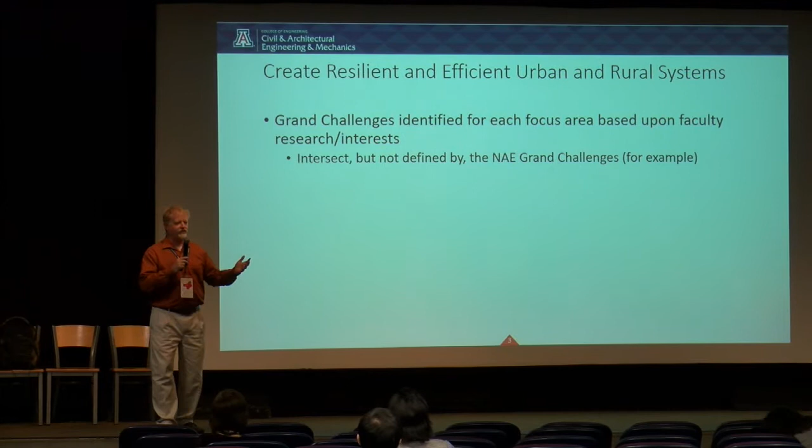As far as creating resilient and efficient urban and rural infrastructure, we've identified grand challenges for each of these focus areas from those workshops, again based on faculty interests. I want to say clearly, because at least in engineering people tend to go towards the NAE grand challenge when you say grand challenges, these things intersect with grand challenges from NAE and other organizations as well. But they're really focused on where our faculty interests lie and what are the big problems they're bringing to bear here at the U of A.

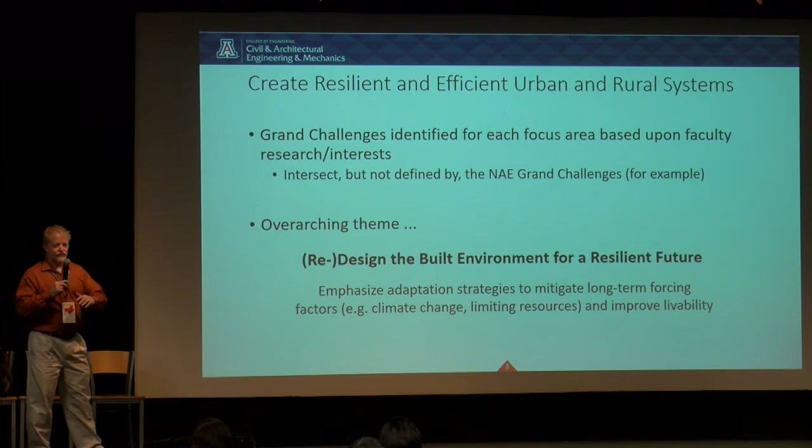So, building on strength: the overarching theme of this particular focus area is the redesign of the built environment for a resilient future. Broadly speaking, this emphasizes adaptation strategies to mitigate long-term forcing factors like climate change or limited resources, and to improve livability. That's a broad description, and it should be considered broad.

More specifically, there are 3 different areas: decarbonization, dematerialization, and circular metabolisms—basically ways of reducing or reusing what would traditionally be a waste stream; creating efficient urban food systems, bringing food to the population in an efficient manner with respect to resources; and integrated water resources management over multiple scales, thinking about how we do water resources management from the source to the tap, and reclaiming that water.

These can all tie into the idea of achieving net zero resource consumption in the built environment. Net zero may not always be feasible, but it's a goal we can strive toward, and if nothing else, we're improving our efficiency. These all fit into that idea of a net zero resource consumption model.

Today we're going to be talking about efficient urban food systems and integrated water resources management, and how they tie into net zero resource consumption. One of the seed grant fundings we got was on net zero urban water, and Courtney is going to talk a little bit about that to give you a brief idea.

We used water today as the theme, but when we talk about net zero resources, it can be much more—it doesn't have to be water, it can be any kind of resource. The other thing we tried to do is bring together talks that span from the technical side all the way to the policy side, because we're never going to achieve all of this unless we start to incorporate all of those different aspects together in a solution.

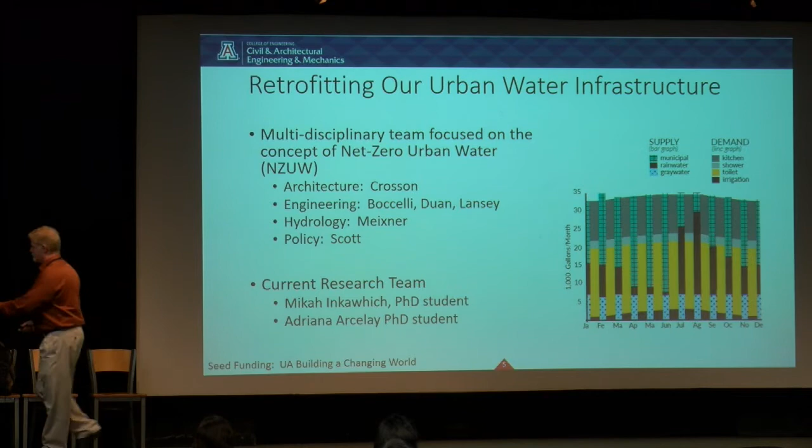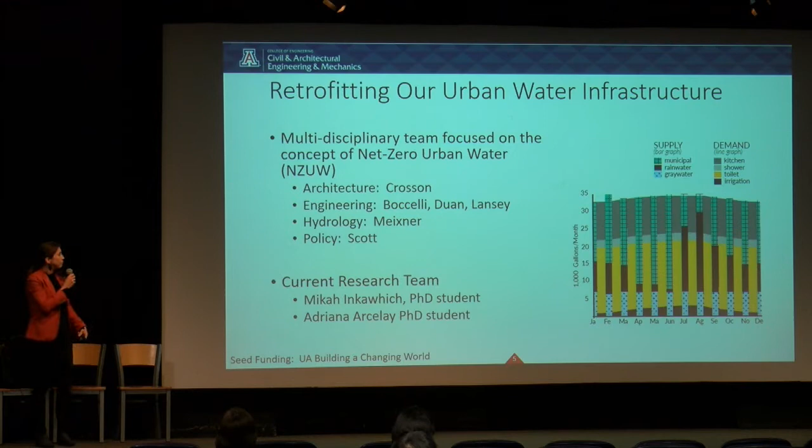Thanks, Dominic. So like Dominic said, he and I are part of a group that received some seed funding from the Building a Changing World initiative. We've been working with colleagues also in hydrology, policy, geography, as well as architecture and engineering, and our focus has been on this question of achieving net zero urban water.

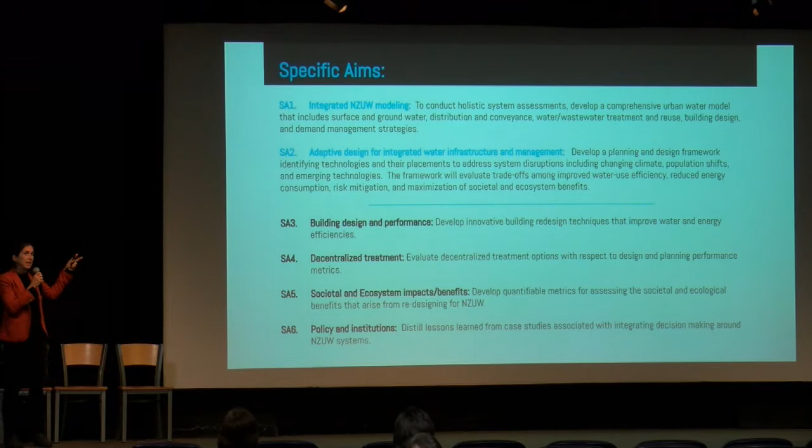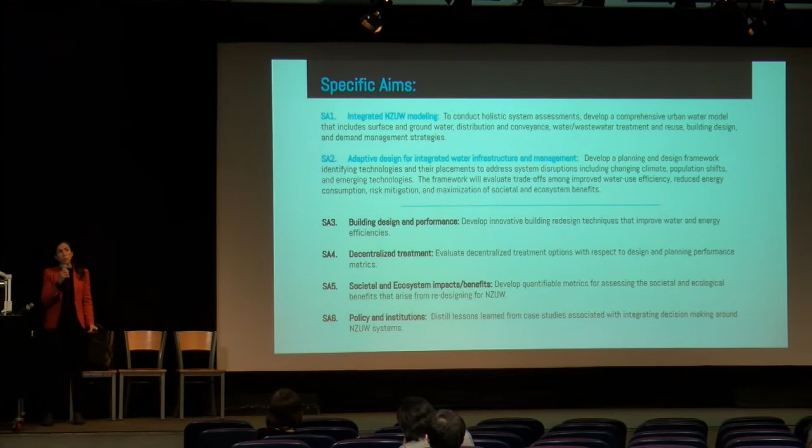You can see our 2 main specific aims up here, and then a few other specific aims below those. Basically the aim is to come up with, both as a tool and an outcome, an integrated net zero urban water model, and then from that, adaptive designs for integrated water infrastructure and management. We've been meeting this semester every other week, and have held 2 workshops to date.

What we've done this semester is come up with 5 specific research areas within this larger net zero urban water framework initiative. Today our 4 talks will not map directly into these 5 research areas, but follow them fairly closely.

The first one looking at urban agriculture, and then the second one really Dominic's, looking at this second research area about retrofitting the urban water system for decentralized and alternative water sources. My talk is third, and I'll be looking at both green infrastructure in research area 3 and then also area 2. Adriana will finish us off looking at public preference and community engagement, and also looking at green infrastructure within that too. So without further ado, we'll turn it over to our first presenter.

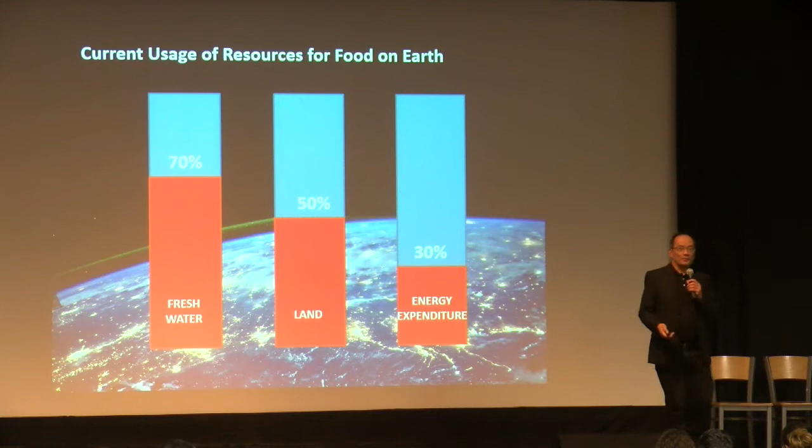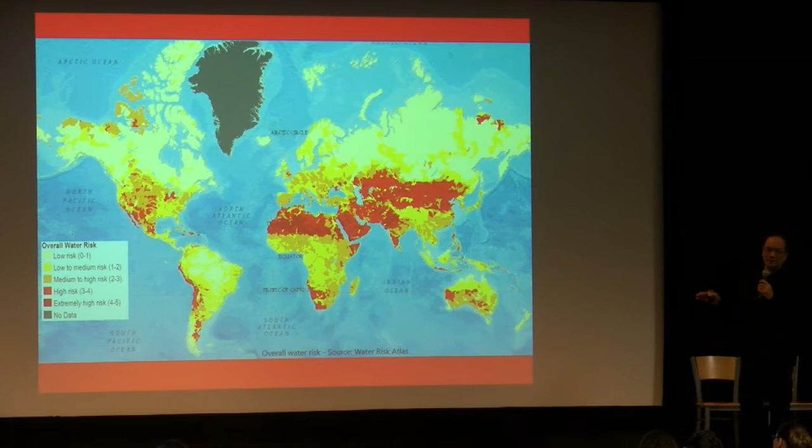So the crucial question now is, do we have all of these critical input resources to be able to meet the demand of our planet for food? And as if that's not enough, our increasingly erratic and changing climate is also introducing a lot of uncertainties and disruption in our global food production and supply. So all these lead to this inescapable thought that, at least in terms of food and the input resources needed to produce the food, such as water, we all are living in a world of scarcity.

But then again, I'm in the habit of reminding my students that we are occupying that commanding height of creating innovative solutions to address the grand challenges of the planet. So we only treat this world of scarcity as a mirage, a beguilingly deceptive, but by no means permanent condition. To put this in context, we need to consider other worlds that are really worlds of scarcity, such as Mars.

On Mars, there's no arable land, no running water. It suffers from wild swings of extreme temperatures, and it's constantly bombarded by deadly ionizing radiation. Bottom line, there's nothing that grows on the surface of Mars, at least outside a built environment. But inside a built environment, you can grow pretty much anything on Mars. And this is no science fiction.

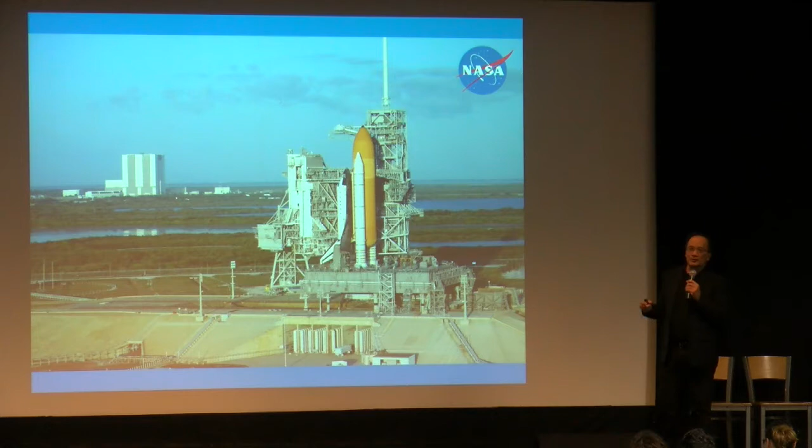It is sealed, and in there you control the important variables for growing crops: temperature, light intensity, light quality, light duration, relative humidity, air movement, and the nutrient composition in the hydroponic nutrient solution that's used. NASA has shown that it can grow pretty much all types of food in this sealed type of environment for long duration space missions.

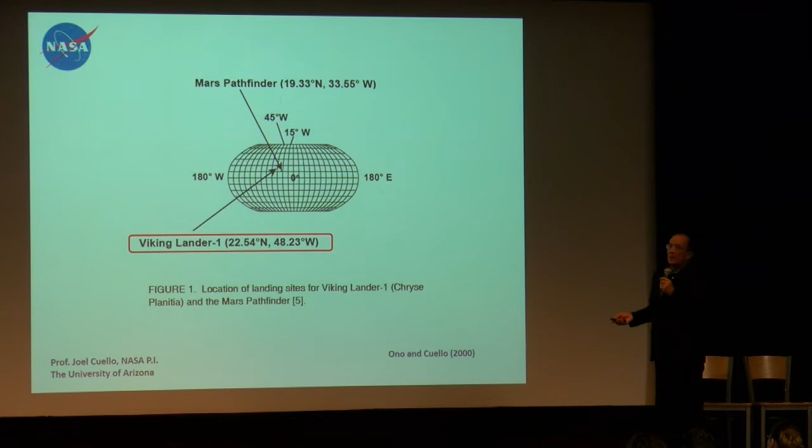When I moved here to the University of Arizona back in 1995, I continued my work on controlled ecological life support systems, including designing the very first hybrid solar and electric lighting systems applied to bioregenerative space life support systems. We did some simulations for landing sites on Mars, and we've shown that by the use of these controlled environment systems, we're able to reduce the energy demand for food production in space by about 40%.

Of course, decades have passed, and I'm sure the efficiencies of fiber optics are much better now, so you can arrive at much greater reduction in energy demand. So what NASA has shown is that when you have technology and innovation—a technosphere—appropriately applied to our resource sphere, our world of scarcity, it is well possible to transform that world of scarcity into a world of abundance.

So back on Earth, in Japan, in the 1980s, a number of entrepreneurs essentially applied the innovations that NASA had developed for extraterrestrial life support systems to develop closed, controlled environment plant factories, or vertical farms. That was the beginning of the vertical farming industry on Earth. It's particularly interesting for Japan because Japan doesn't have a lot of land resources to feed its large population, so it really made sense for them.

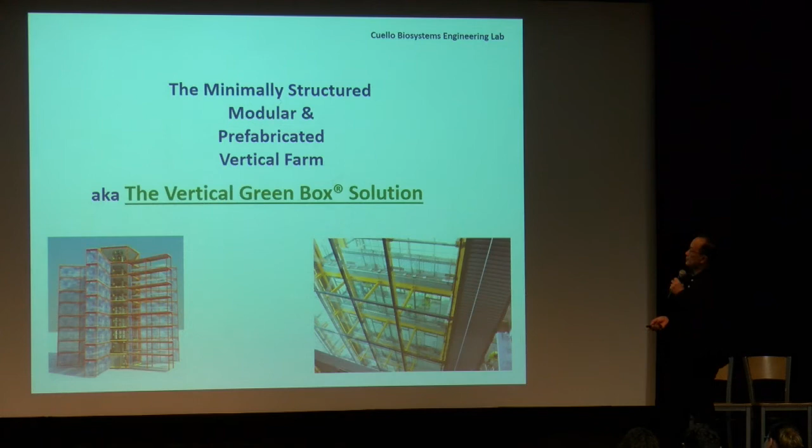Dickson Despommier is a retired professor at Columbia, and he wrote a book called Vertical Farming—he's the big exponent for the high-rise type or paradigm for vertical farming. What I've been championing is the modular structure for vertical farm, just because it's more accessible and more affordable to more people, allowing more people to gain entry into the vertical farming industry. Specifically, I'm championing the minimally structured, modular, and prefabricated vertical farm, which could have versatile configuration.

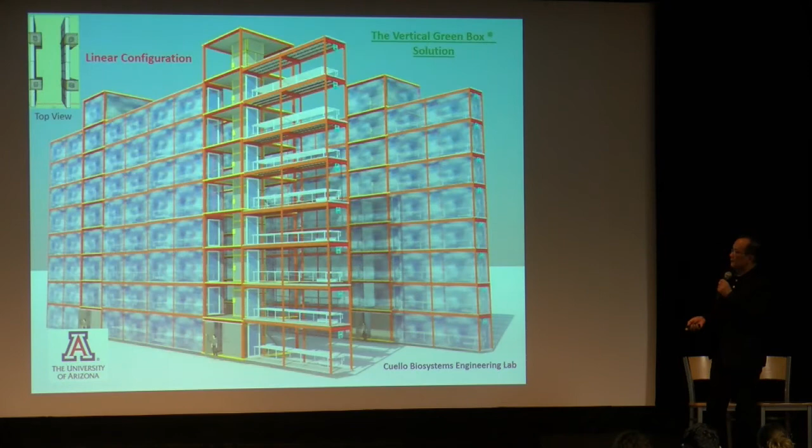You've got your modules that can be arranged in different geometric configurations, like a cylinder configuration, a linear configuration, and of course there are many other possibilities.

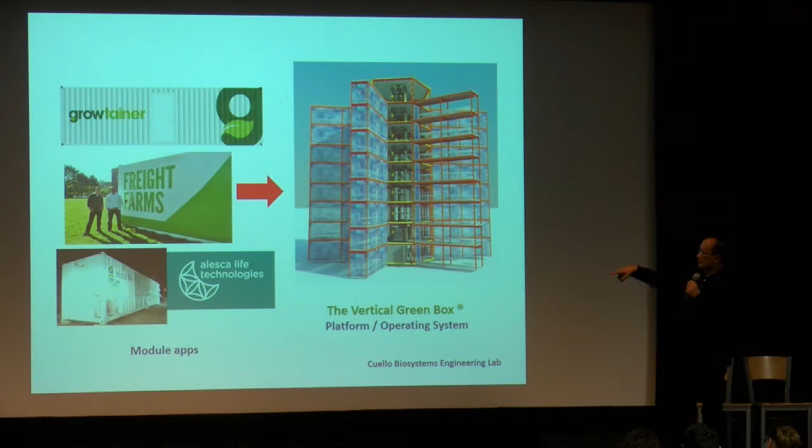A practical example of a vertical farming module would be your standard shipping container. In fact, a number of companies have been working on retrofitting shipping containers, turning them into modular vertical farming units. Here at the U of A, we have one we play with together with my grad students. We call it the Arizona Green Box, funded by the UA Green Fund. But we also design our own original growing systems inside the modular unit so that we could really maximize the amount of crops being produced.

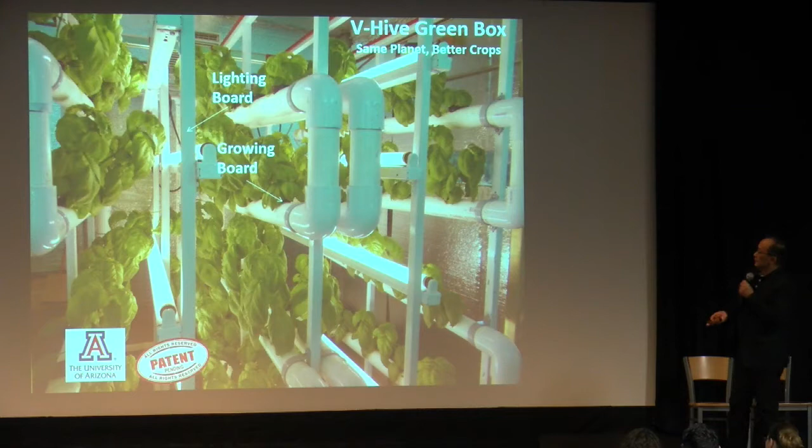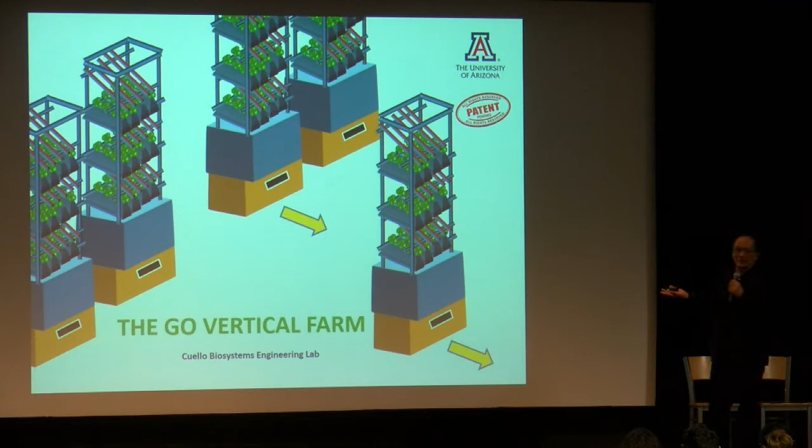This is called the V-Hive Green Box vertical farming unit, patent pending by the U of A. And this is another one - this is a mobile type of vertical farm. It constitutes really a whole new paradigm for vertical farming. As opposed to a fixed vertical farm, you now have a mobile vertical farm with those mover robots, kind of like the system Amazon has in its warehouses.

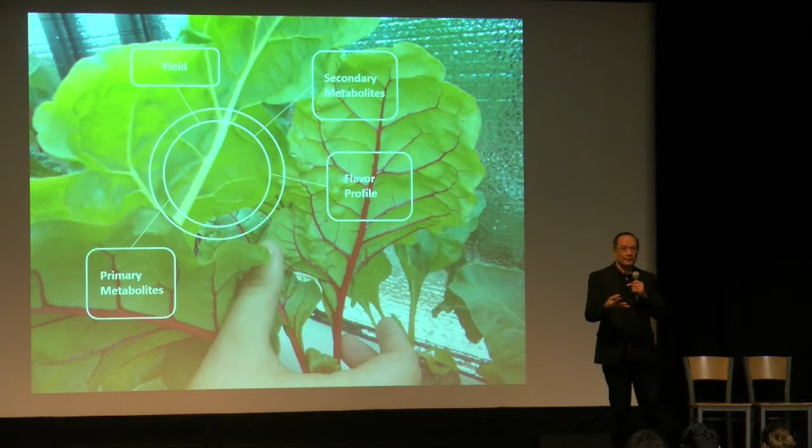So anyway, vertical farming is really emerging and spreading worldwide today. It's not only because it leads to maximum yield, maximum quality, maximum flavor profile, and optimized nutrient profile for the crops they produce, but also because they save on the input resources needed to produce crops. For instance, it saves about 80 to 95% of water compared with open field cultivation. And now with data analytics and artificial intelligence, there are ways to minimize input resources such as heat, nutrients, nitrogen, potassium, phosphorus, CO2, light, and so on, so that you can still produce the same amount of yield and the same quality for the crops.

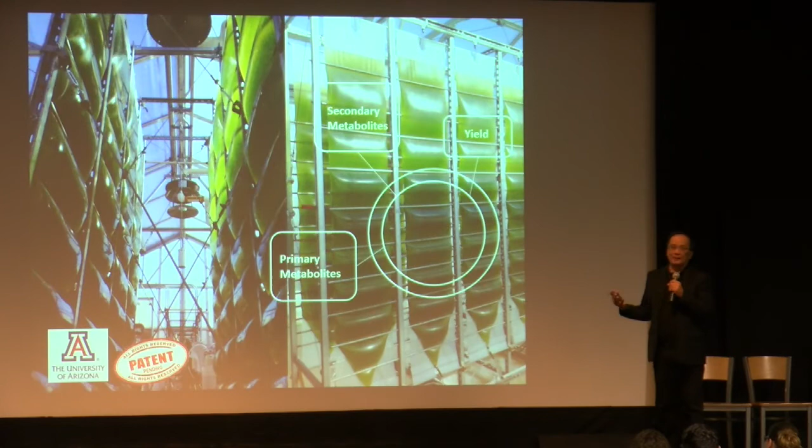And of course, it's not only conventional food crops that you can grow in vertical farms. You can grow algae, which produces a lot of valuable chemicals or products. You can produce fish, and you can produce mushrooms as well.

So then how do we make vertical farms integrated components or nodes in a circular economy in an urban area and ensure its sustainability and resilience? Of course, it's good if cities have access to renewable forms of energy such as solar and wind, but not all cities do. However, there's one thing you can rely on with cities, particularly big cities, and that is they produce tons of waste.

So let's consider New York City. I'm citing New York City because there's a number of vertical farms now there. New York City produces 1.3 billion gallons of wastewater per day and 38,000 tons of solid waste per day.

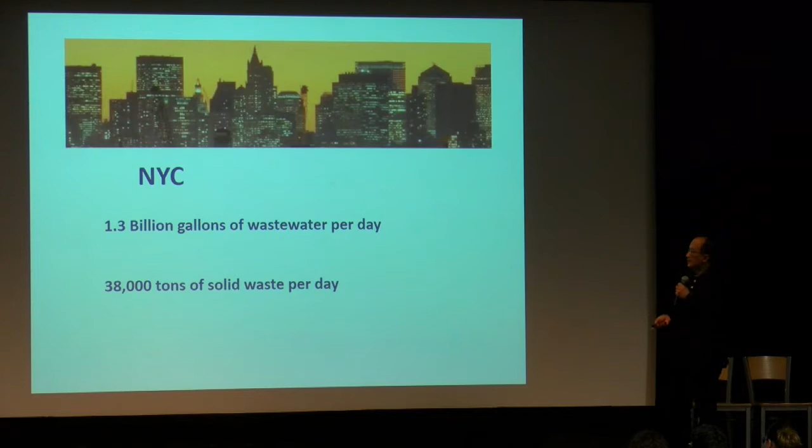It's been designed to accommodate 1.5 million gallons of sludge daily, even though they're not operating at full capacity yet, and up to 500 tons of organic food waste per day. What's remarkable about this Newtown Creek facility is that they're not only using wastewater - they're collecting organic waste, such as food scraps from hospitals, schools, homes, offices, and adding them into the sludge.

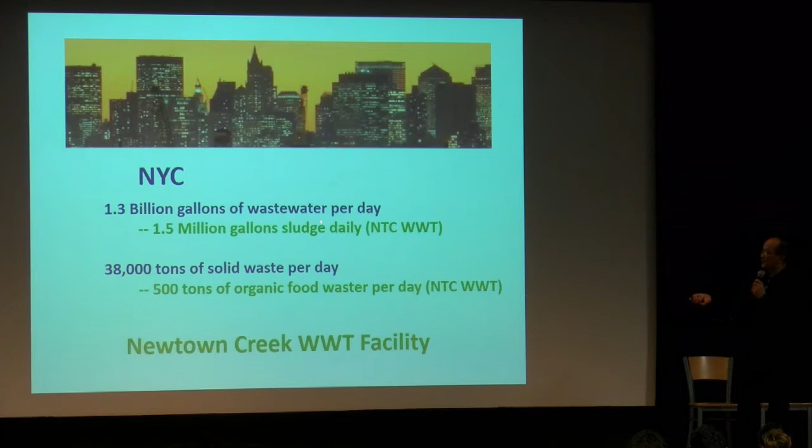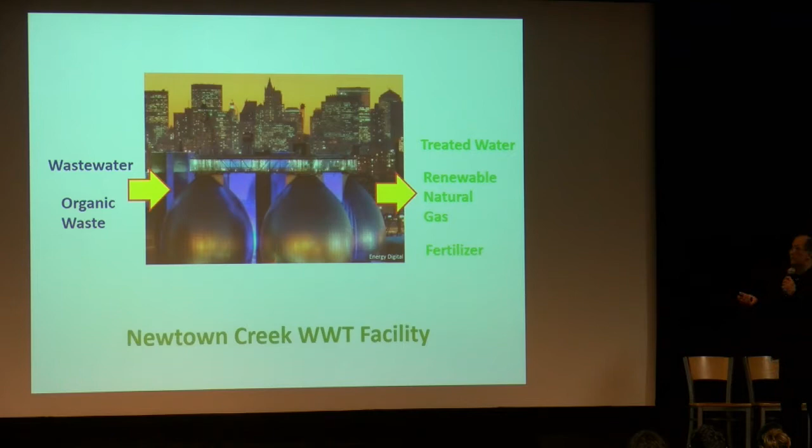And the great thing about that is with wastewater and organic waste as input, you produce not only treated water, but renewable natural gas. Of course it's biogas with methane, but with further processing you generate pipe-ready renewable natural gas, as well as concentrated fertilizers.

So based on this, it's possible to construct this circular economy scheme where you have these nodes of production and consumption interlinked by the influent and effluent streams they produce, so that overall you minimize and hope to reduce to zero the waste produced by any one of these nodes. This is very much consistent with the aspiration to come up with a net zero resource plan.

For instance, the homes produce wastewater and food waste. They go into the treatment facility, and there's treated water and renewable natural gas that can be channeled back into the homes. The vertical farms produce a lot of inedible waste biomass - they could be brought into the treatment plant, and in return you get water, fertilizer, or renewable natural gas.

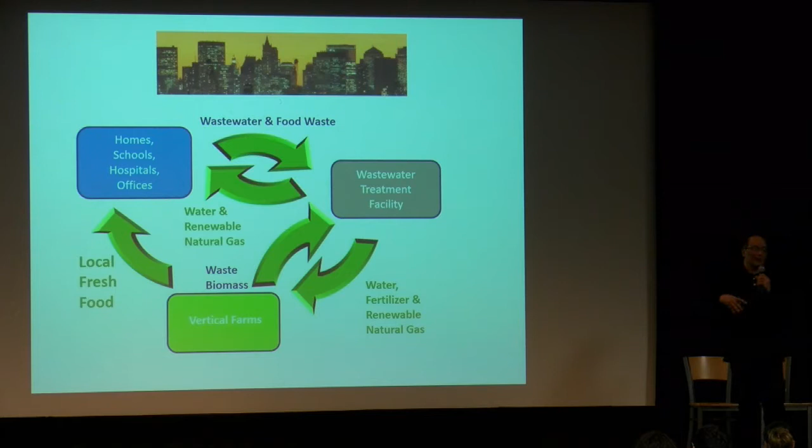And of course, with vertical farms, you produce local, fresh food. You cut down on carbon emissions because your food doesn't have to be transported thousands of miles from the West Coast to the East Coast, in this case, for instance.

So this is the grand plan that Dominic shared earlier, and I want to emphasize the urban food production here. One way of looking at this going forward is that you can consider this entire thing as one plane. I could refer to that as the water plane, and then you've got the food plane and the energy plane, and each one of these planes are interacting with one another.

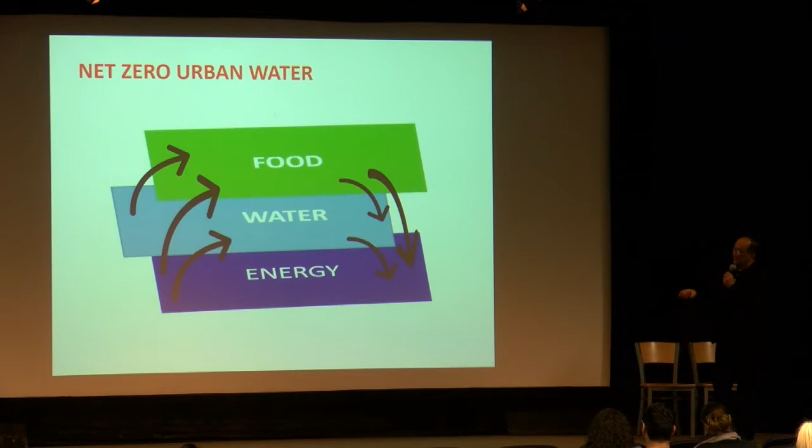So you have your net zero urban water within the context of the water, food, and energy nexus. I'm proposing that net zero urban water is most effectively designed within this context. So that's the food for thought I'm sharing with you today. Thank you.

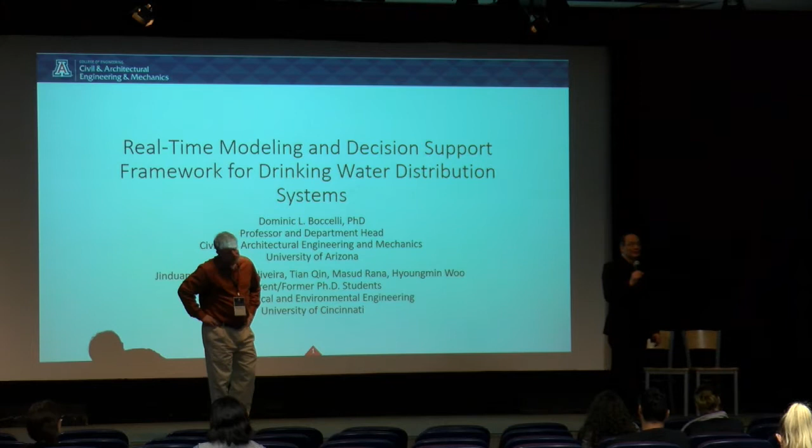Yes. Correct, yes, that's an excellent question. As I mentioned, the vertical farming industry began in Japan.

In Japan, it's very much readily accepted by the citizenry because Japanese consumers are willing to pay for something that's really of high quality. I've been to, I think it's called Shinjuku, one area in Japan, where they're selling apples for $100 each because it appears perfect in their eyes. So in Japan, this is true, they have no problem.

In China, I was surprised because vertical farming is really taking root there, and that's because the population has been rocked by a lot of food scandals and food contamination issues. So families are now really concerned about the safety and quality of their produce, and they're willing to pay a higher premium for produce coming from vertical farms as opposed to open farms. The same is true here in the United States, at least that's the public perception, as well as in Western Europe.

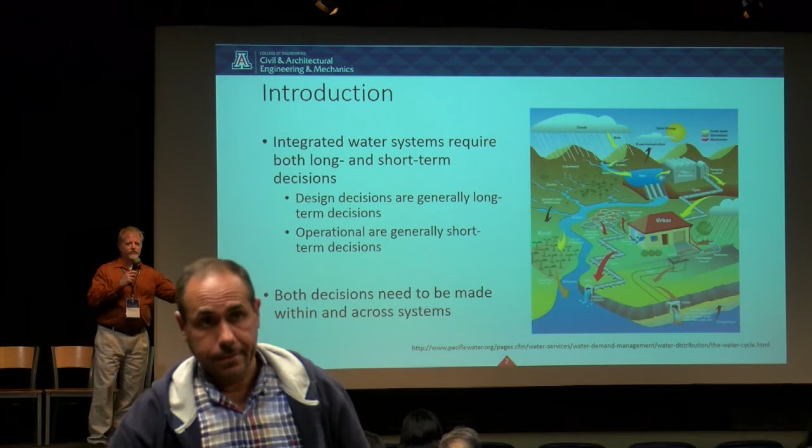So we started off, Courtney started off the talk by bringing up this notion of net zero urban water—this idea of going from supplies to the consumer and basically reclaiming and reusing that water to try to minimize our need for new sources.

These integrated water systems really require us to have both long and short-term decisions. Design decisions are generally long time-duration decisions—when you build infrastructure, you're thinking 40, 50 years down the road. Operational issues are the short-term decisions needed to make sure these systems all work efficiently together. Both of these decisions have to be made within their specific systems and across the systems.

We need to be able to estimate unobserved system states—for example, where the flows are everywhere in a system, like river flows. We can't measure everything, so we have to estimate these states, and we need to be able to forecast performance, particularly as we're making decisions.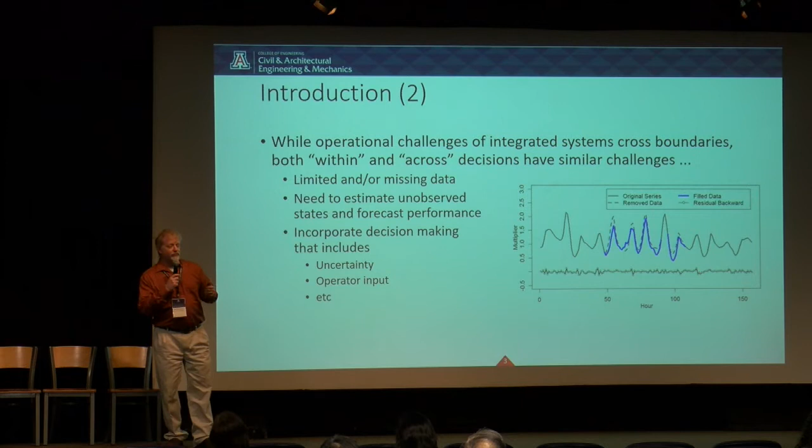Incorporating that decision making, in my opinion, we need to incorporate the uncertainties. There's all sorts of uncertainties that need to be incorporated to make sure we have robust decision making. A lot of this requires operator input—operators aren't going to just buy into what a computer model tells them to do. So this kind of decision framework needs to be usable, while also giving operators information so they can incorporate unmodeled aspects if necessary.

These models are not generally tightly connected to the data that utilities collect, meaning utilities collect data and see it, but their model is on another side—in general, the model and the data streams aren't integrated. These models also may not be adequately calibrated; they're tuned for certain times of day or a season.

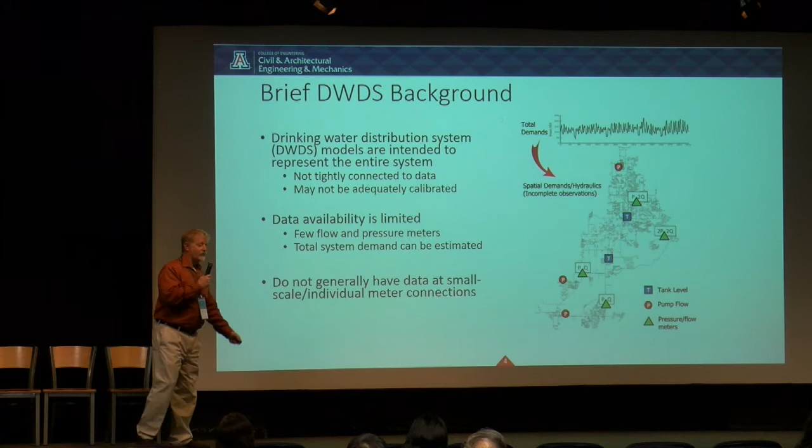Data availability is generally limited. You can see this system here, a medium-sized city, only has about 15 measurements in the system between flows and pressure. So there's limited data, and demand—how we use water—is really what drives how water moves through the system. While we have an idea of total demands, we don't necessarily know the spatial distribution; we generally don't have data at really small scale or individual meter connections.

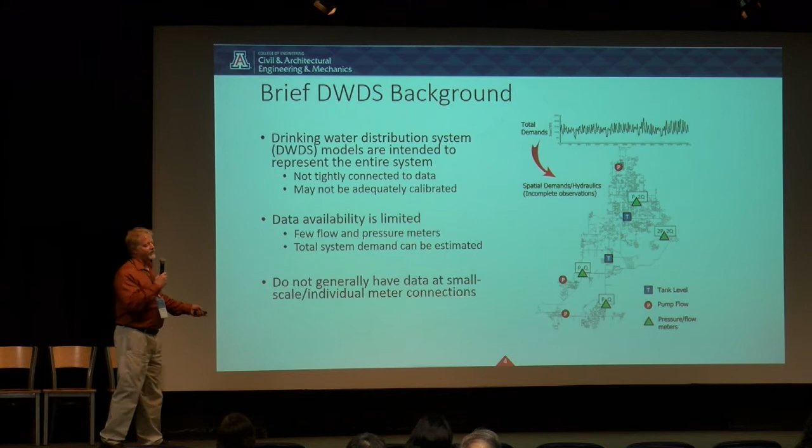Now that is changing with smart meters—more utilities are collecting that data. A lot of the ones that collect it actually have no idea what to do with it once they have it, and that's what we're hoping to take advantage of. But in the meantime, a lot of utilities haven't gotten to that point yet. So we generally need to be able to estimate these demands throughout an urban environment, and then forecast it, which will allow us to make our decisions.

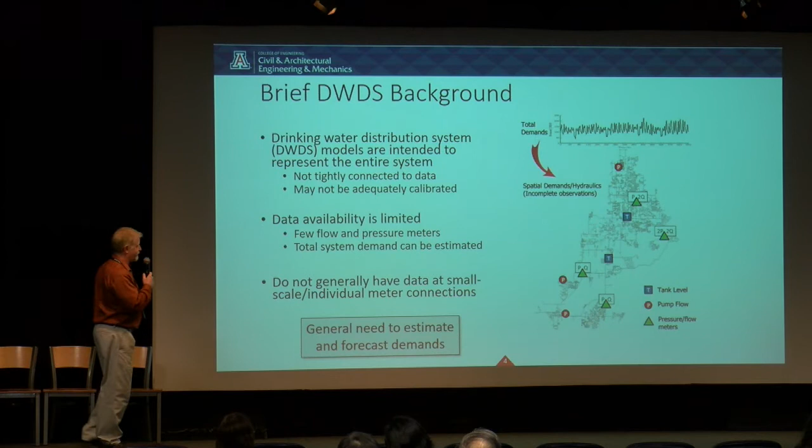So very broadly, we've developed an algorithm. My student Jin-Duan Chen is fantastic, he developed this composite demand hydraulic model. What he did is basically take time series modeling techniques to represent demands, because if you look at how water is used in an urban environment, it's very diurnal. It goes up in the morning, down towards lunch, back up in the evening, then drops overnight. So it's very conducive for using time series modeling. And we've linked that with a hydraulic solver called EPANET, so basically if we know the demands, we can know the flows and pressures throughout the entire system.

So the algorithm we developed is able to estimate consumer demands at an hourly time step, or sub-hourly if we wanted to. Using that data, we can estimate parameters of our time series model, and that becomes important because it really allows us to forecast. So we're the first group to really start thinking about how do you take this data and estimate the demands, which a lot of people did, but how do we use that information to do forecasting, which allows us to do decision making.

So we've done this assessment with a real world system, this one from Florida. It has 6 flow measurements, 9 pressure measurements, and 60,000 service connections. The model has 12,000 nodes. A service connection is basically any meter. As far as these kinds of models go, this is pretty detailed, a lot of models don't get down to this level. Most of this area is residential, with a couple small commercial zones. We're using this as our test case.

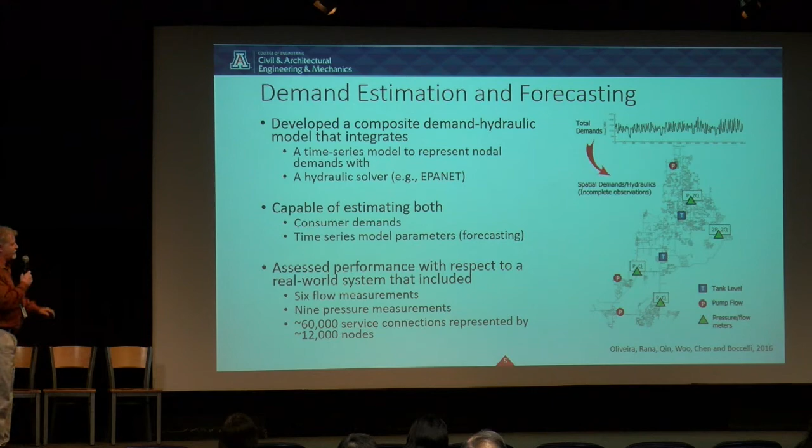We did a lot of field work down in this particular area of Florida. The biggest challenge we have is we've got to reduce the number of unknowns. The pressure data doesn't really help much with estimating demands, so we basically have 6 flow measurements and 12,000 unknowns. That's not a feasible problem.

So to reduce the parameterization, we've been doing work on different clustering techniques. This one was done using sensitivity information, looking at how the demands affect the flow values we have measurements for, using a singular value decomposition approach. That gave us these 4 clusters here. The northern region gets split up into 3 zones, the south region just 1 zone. The northern region is more densely populated.

What we've done is estimate the demands in each of these clusters, and then we have a time series model that we can use to forecast the aggregate demands in those clusters. So we've got 4 clusters, and this work is showing 4 clusters and 6 different results for the 6 flow meters. The flow meters here are given by the arrows. I'll start here - this is the treatment plant. There were 2 flow meters out of the treatment plant, 2 in this northern region where the flow branched off, and 2 in the southern region along 2 parallel paths.

There's lots of results I could show you, but I'm going to focus on just the flow measurements. This top row are the 2 flow meters leaving the treatment plant - the black lines represent the estimated values and the blue are observed. We get pretty good representation of these values, which is nice because we're not saying what the total demand is, but we're coming back and saying, okay, we're getting basically the total demand, so we know the demands are giving us the total overall system demands.

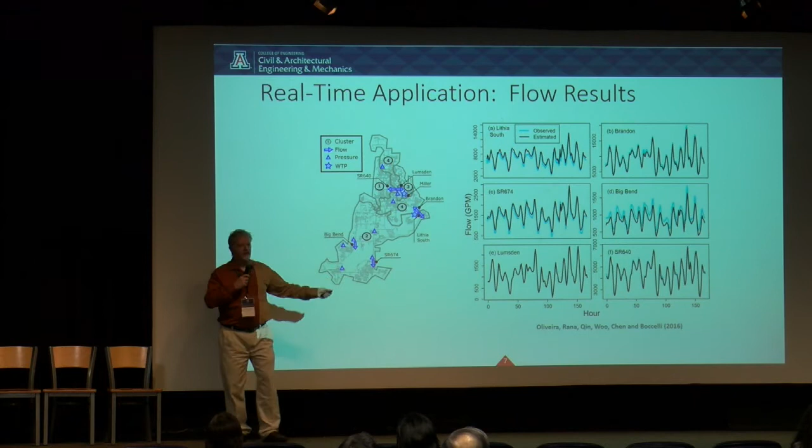This middle row are the 2 flow meters in the south region. The one in the east we tend to overestimate, and in the west we underestimate, but mostly because this is in one big cluster. If we had a little bit more data, we could maybe split this and get better spatial distribution of our demands and do better there. But all in all, that's still not bad. And then these 2 flow meters, we get almost perfect results because each flow meter basically ends up being associated with a cluster.

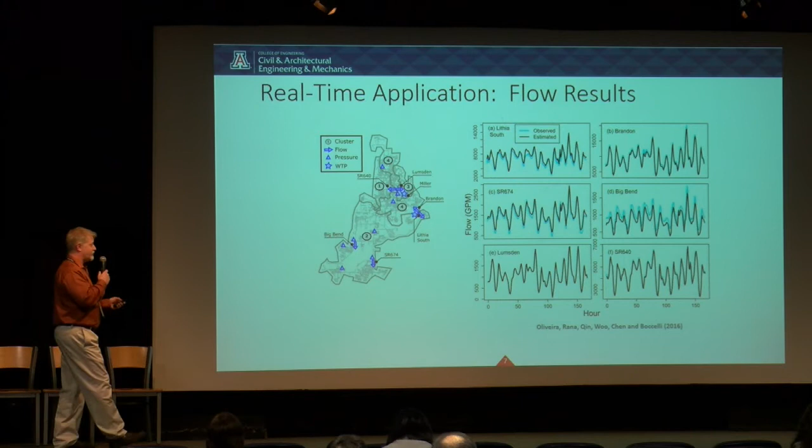So these are all improvements to what the utility had originally with their network model when we just ran it. I try to tell my students, that's great, we can match those 6 data points, but what does that really mean for the overall network? So we also did some tracer tests, which I can't go into here - 40 different monitoring locations, and we compared the tracer signals before and after we did this work. We see an improvement overall in the system in the transport, so we know we're doing a better job representing the overall dynamics within that system. And what that allows us to do, if we feel like we have a better handle on what's going on in the system, we can start to do this in real time.

We can do real-time demand estimation and forecasting, and that allows us to do some operational decision making. So where we're at right now, I'm going to go into that decision making part, we're talking about energy. Drinking water distribution systems generally use about 3% of the US electricity.

Pump scheduling is normally done modus operandi. You've got your utility operators there in a command center. They utilize knowledge about future demands. This represents a diurnal pattern, a discretized diurnal pattern that generally happens every day, different magnitudes, but that's pretty much the shape. They know the system, and they usually know it really well. They know at least where the water is going, roughly.

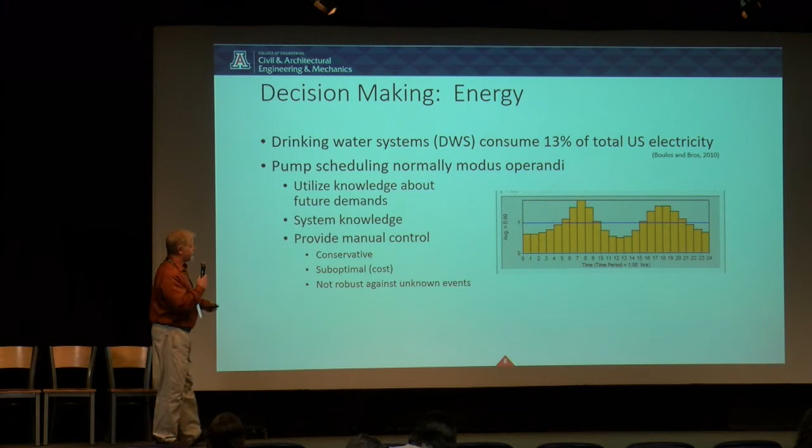And they provide manual control, which tends to be conservative, which is okay because utility operators want to make sure we have water. It can be suboptimal. They're not trying to always say, okay, we've got this quick cost break here, let's go and pump more right now. They may not get that information in enough time. And the decisions may not be robust against unknown events.

So we've taken this demand estimation and forecasting algorithm we've developed and applied it to the real world. What I'm showing you here, these are 2 different clusters. The black lines represent estimated values. These blue bars are actually a 1-hour ahead forecast. I'm not going to get into details on that.

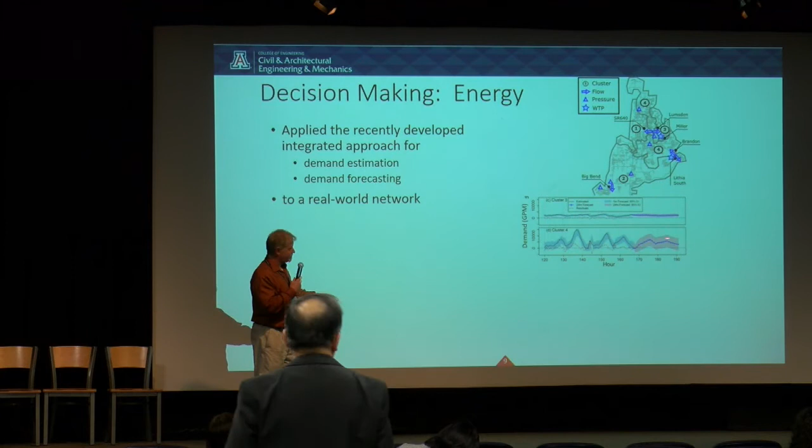What's important is we can stop at this time and say, okay, this is our real time where we're at now. We can forecast demands ahead in time, as well as the uncertainty, and that provides the basis for our decision support. Because if we can say these are our forecasted demands, we can simulate that in our whole network model. We can look at, for example, this tank level. This red line represents an expected value, and all these little blue wispy lines represent the uncertainty or the response to uncertainty in those demand forecasts.

So when we try and make pump decisions, we want to make sure that we're accounting for all that uncertainty in the system. And so we're using this information now to try and improve pump operations while accounting for that uncertainty. And how do we do that?

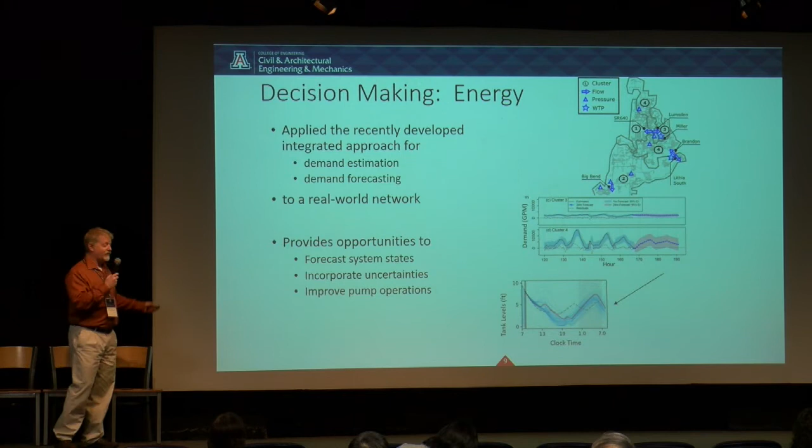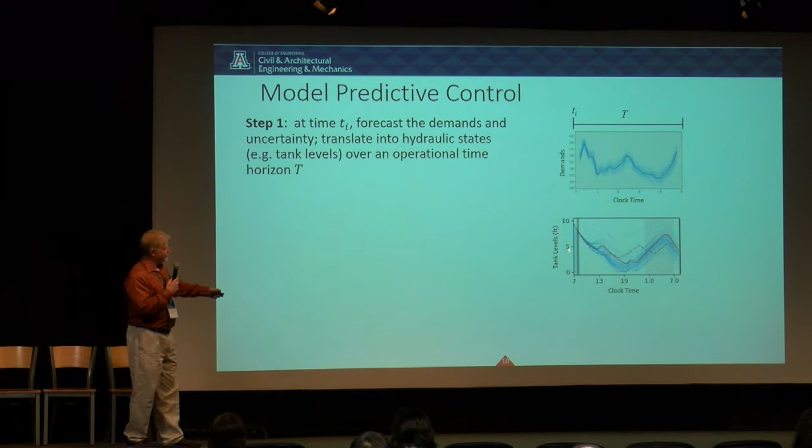So we're using a model predictive control, and I'm not going to get into the details of it, but if you say, okay, right now, time TI, I'm going to forecast these demands, and this is basically what that looks like, this Monte Carlo simulation. This is the tank response to it. So I know my forecast over some time horizon, let's say a day.

We use an approach called the DREAM algorithm. It's a Markov chain Monte Carlo type approach. And what we do is we determine the time duration between pumps going on or off. We're trying to do this to minimize costs and maintain tank levels.

This is schematically showing what you're doing. So if the pump starts off at on, we're trying to estimate, okay, how long till you turn it off? How long till it goes back on? How long till it's off? How long till it's on? It's a continuous formulation. Other people have tried to solve this as a binary problem. This is a bit easier to solve.

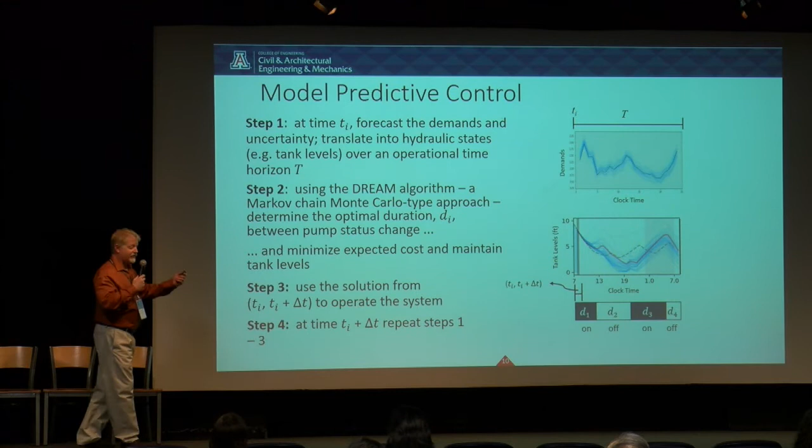And what we do is even though we're making a solution for this 24-hour time period or this longer period, we're going to use that solution for just a short time step, delta t, maybe 15 minutes, maybe an hour. You run that solution, then you collect additional information, you get to that point, you collect the additional information, you update the decisions. So what it's giving us is a rolling time horizon of decisions that are continually updating as we're getting more information in the system, so we don't have to rely solely on our forecasts.

So a lot of pump optimization that's been done in this area has been very much deterministic, setting a case for 24 hours and then leaving it.

So just to give you a rough idea of what this looks like, this is a plot of the pumps, different flows. So if you're saying, okay, I'm at 7 a.m., this is my pumping schedule for the next 24 hours. So this is where we're just at this point, all the pumps should be off. Here you see they're on for a little bit, then they go back off and they come back on. This point here is actually where the energy costs are lower, so we really want to do more pumping here.

So you see that a little bit. But the other thing is these are 2 tanks that were in the model. You see the tanks are slowly draining. So at the end of 24 hours, they're getting low.

Because all we're doing right now is saying, here we are at 7 a.m., what's the best way to operate the system? All we really care about is saying, hey, these pumps should probably be left off. At 8 a.m., we're going to go collect more data and determine what the pump should look like.

So if we take that, and now let's say we're at the end of 24 hours, we're looking back as to what we've got. So this is what the actual solution would have looked like. Here you can still see some pumping on in the more expensive time period, but then you see all the pumps are on when the rates are cheaper.

The tank levels you can see for both of them are coming back up, which we want. We want the tanks to be full. And you can see here that this tank gets close to its minimum value. It's not really empty, but this would be its minimum value.

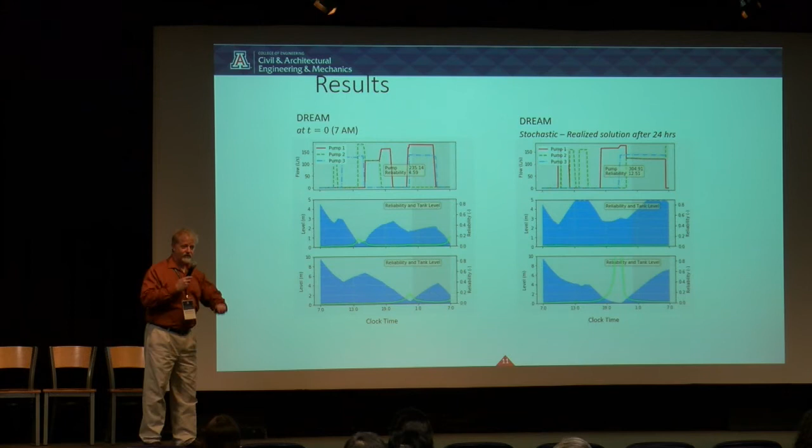So this rolling horizon, even though initially we say, yep, it's going to drain with this solution, because it's always forecasting and it doesn't want those tanks to empty, it brings the tank levels back up.

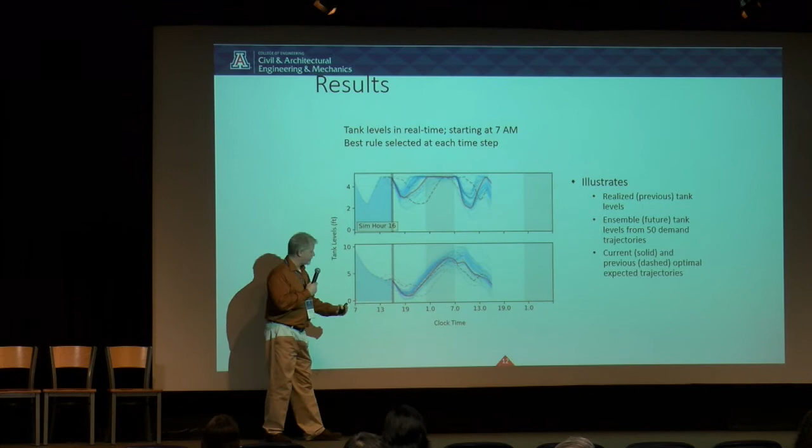And I just want to show you this. So this is kind of a graphic of what is really going on. So this big gray bar represents where you're at. This particular time, the red bar is the forecast.

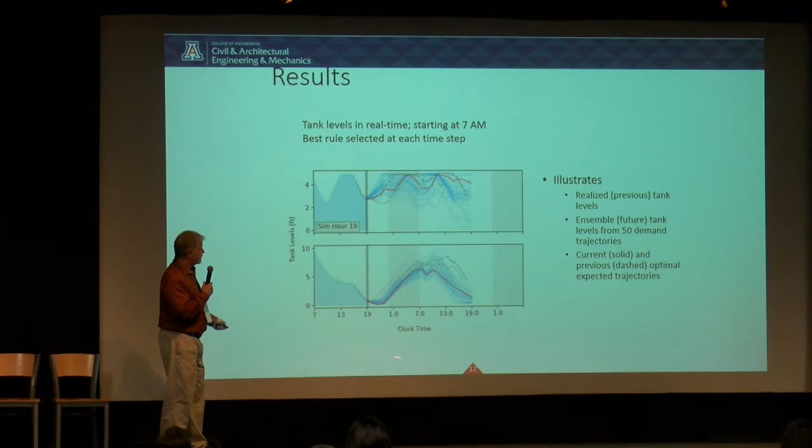Those dash bars are basically your past expected, or your solid bar is your expected forecast. The dash bar is what you had in a previous time. It starts to fade away. And those little blue wisps, again, are the uncertainty associated with it. So you'll see in this first tank, there's some really large uncertainties here, which is why it never gets close to the minimum. This tank, the uncertainties were much less in it, which is why the tank was allowed to get closer to its minimum value.

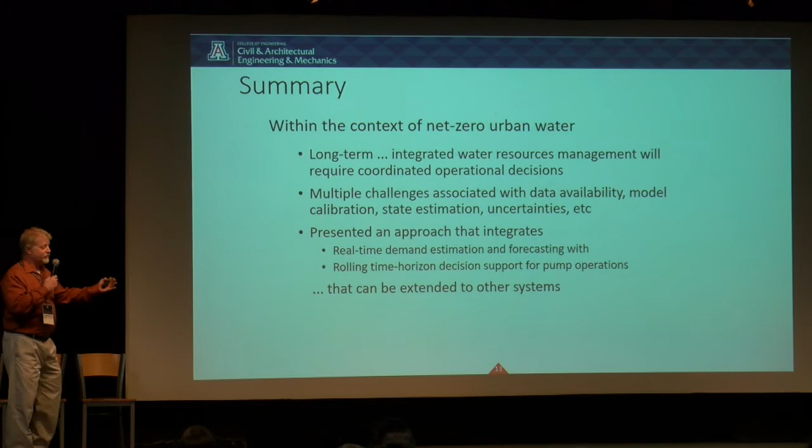So within the context of this net zero urban water, long-term integrated water resource management, it's going to require coordinated operational decisions. There's going to be multiple challenges associated with data availability, model calibration, state estimation, uncertainties, getting models to talk to each other.

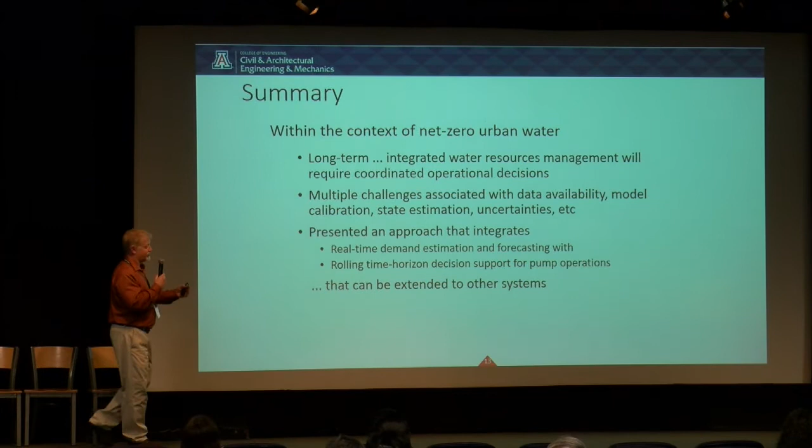But what I've tried to do today is present an approach that integrates a real-time demand estimation approach, which could be extended to other areas, and forecasting with a rolling time horizon decision support for pump operation.

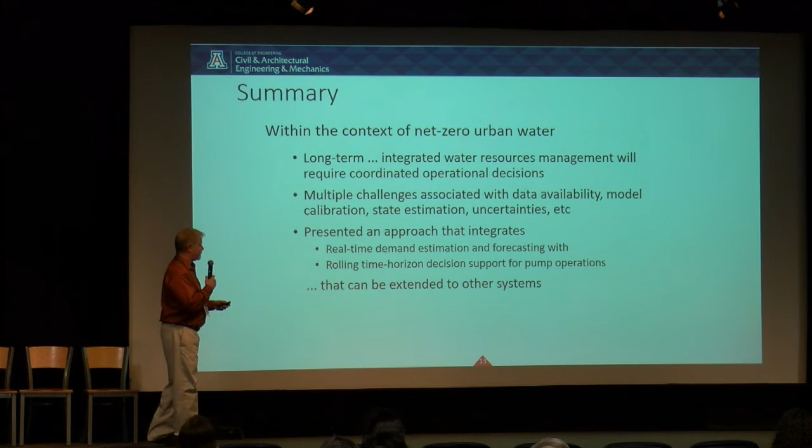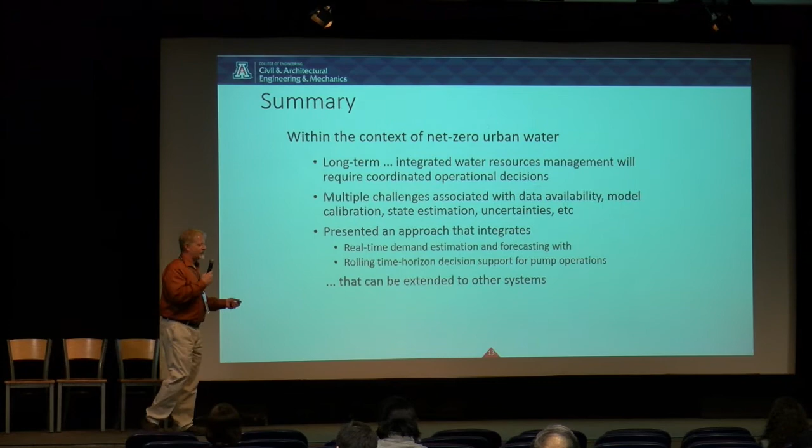So we've been approached by like the Army Corps for doing some of this for reservoir management. When I was still in Cincinnati, our storm and wastewater group was very much interested in how they could use this kind of technique. And I just want to acknowledge the funding we've had from that.

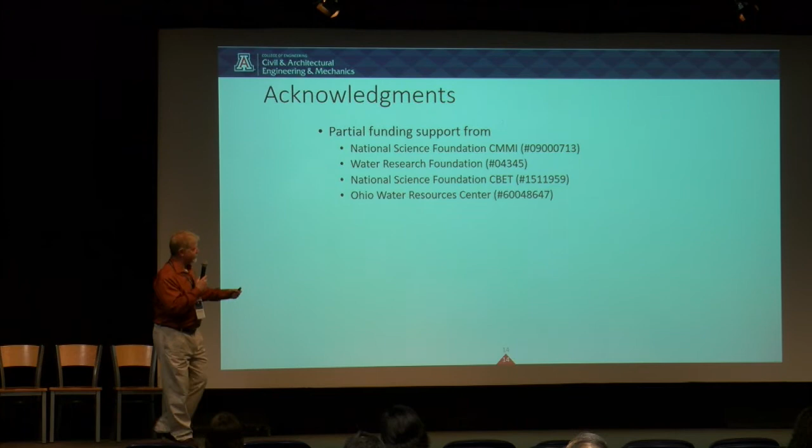And so that's a very quick summary of our project of trying to look at making decisions in real time, incorporating information and uncertainty, and improving basically, in this case, the energy utilization from water utilities. I'm happy to take a couple of questions.

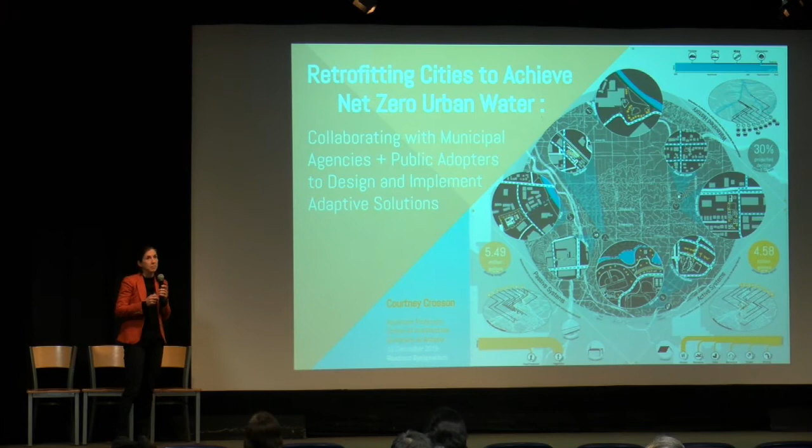Great, those were two really excellent presentations. So I will be talking about retrofitting cities to achieve net zero urban water, particularly with decentralized infrastructure. I'm an architect, and I'm interested in designing and implementing adaptive solutions, particularly these decentralized solutions and the network impacts of those solutions.

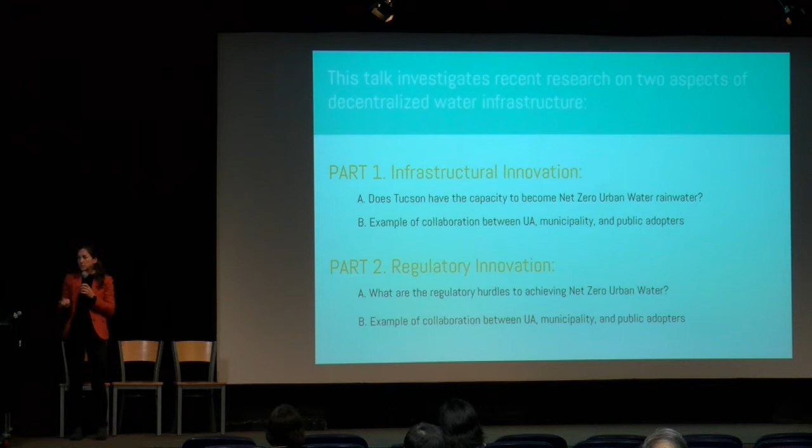This talk is going to look at two different areas of incorporating decentralized infrastructure. Part 1 is infrastructural innovation, and part 2 is regulatory innovation. Underneath those two, I'll talk first briefly about a research project, then about bridging that into some of the work I'm doing with the city and county, and also with Henry Johnston, who's here from GLHN Architects and Engineers. In my work, I do both research, and I also teach design studios that take that research and start to speculate and envision new design solutions for our urban environments.

The first research project looks at integrating decentralized rainwater harvesting. It started from a fact I'd heard thrown around Tucson quite often by the public. In 2016, our residential water demand was 87,000 acre feet, which equated to about 29,000 acre feet of imported water. In the same year, we got 125,000 acre feet of rainfall. So we get more rainfall than we actually use in Tucson. Isn't that crazy? That rainfall equals about 144% of residential demand, or 430% of our imported water.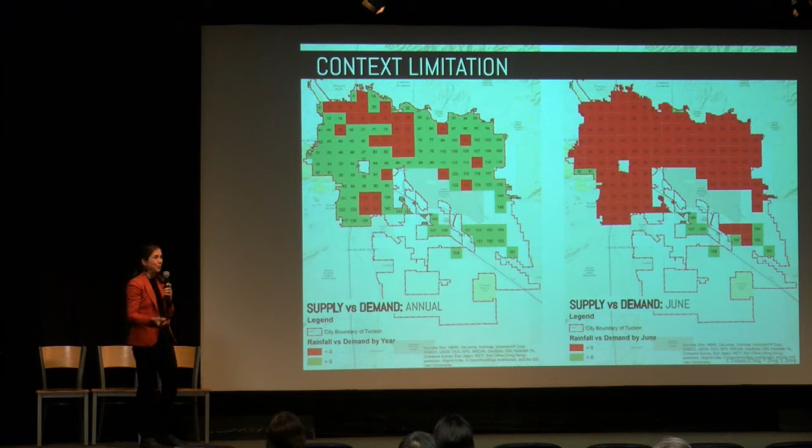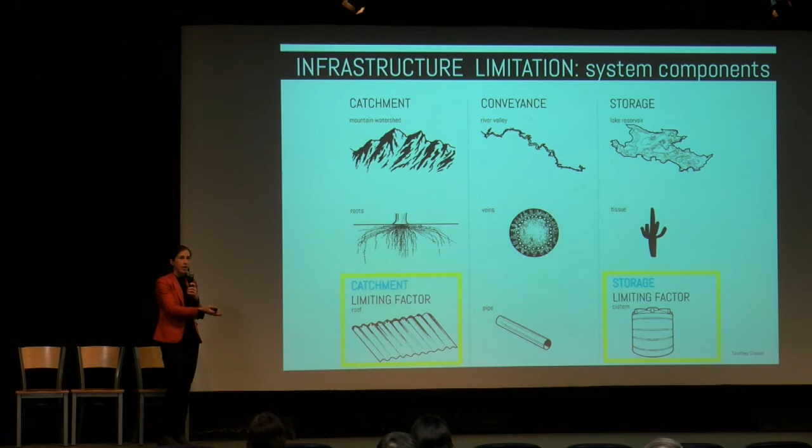But of course we know the situation is much more complicated than that. These are township squares in Tucson, 1 mile by 1 mile squares we have data on for both supply and demand — on the left is annual, on the right is the month of June. We have context limitations with rainfall; we only get it in bursts at very specific times of the year. And we also have infrastructure limitations: only a certain amount of catchment surfaces, and only certain storage volume sizes.

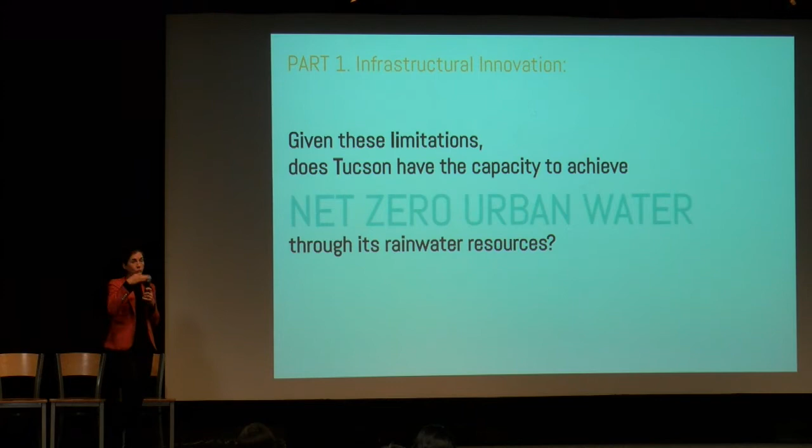So this project looked at what storage capacity would be necessary per township square, per household, to achieve net zero water in Tucson. I worked with a physical geographer on this, using a few different remote sensing methods, and then inputting into a water independence, or net zero urban water, model using MATLAB. We solved for the fixed parameter being the roof sizes, isolating the different types of roofs and slopes to accurately estimate the water collected.

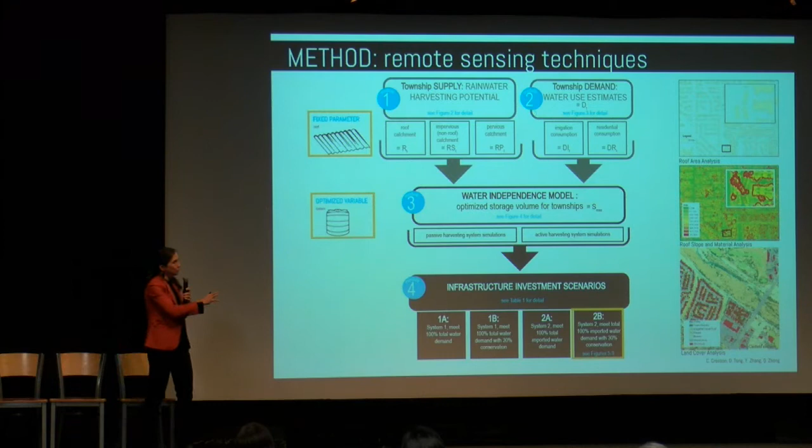And then we solved for the necessary cistern size to reach a net zero urban water target. You can see we had a few different scenarios. The one I'm going to show you was the most practical, which is where we only replaced imported water—CAP water, Central Arizona Project water—and we also assumed a 30% conservation.

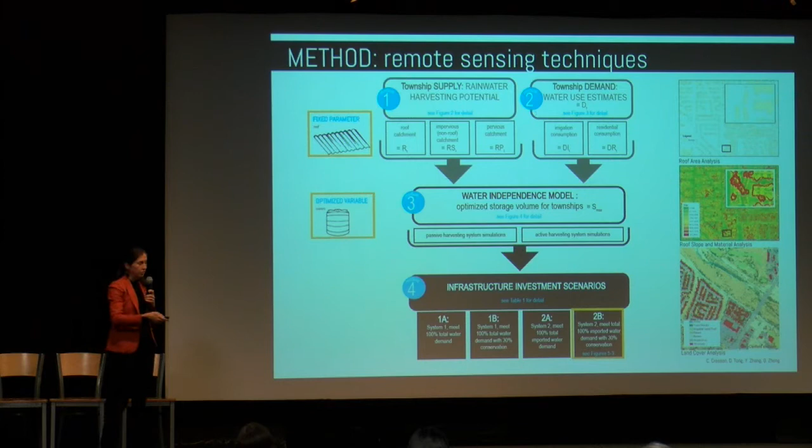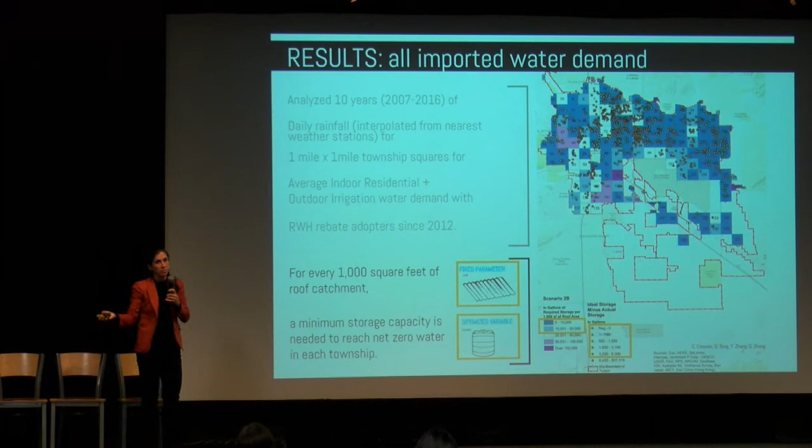Really quickly, this is the 1 mile by 1 mile township square sections. We used 10 years of real rainfall data from 2007 to 2016, interpolated from the nearest weather station. Those 10 years of daily rainfall data represented mega drought conditions where we had back-to-back-to-back drought.

The results were that for an average household, most areas would only need a hot tub size storage, and then many other areas would need something more like 10,000 to 15,000 gallons, which is about an average pool size. So that's a glimpse.

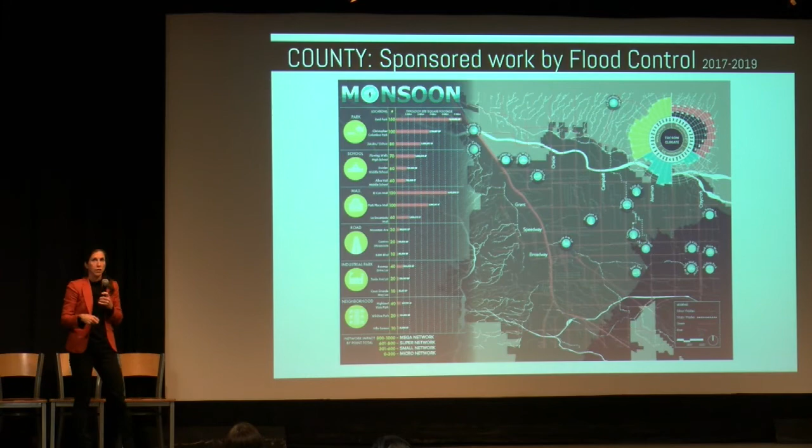Of course there's a lot more to go into with that project, the analysis, and the findings. But what I want to connect it to is work I've been doing with the city and the county, particularly funded by Pima County Flood Control for the last 3 years. They've been funding a studio I teach every fall semester, and basically they provide the students with 6 different sites throughout Tucson, and we design decentralized solutions to those sites that mitigate flooding and realize other co-benefits for those different areas.

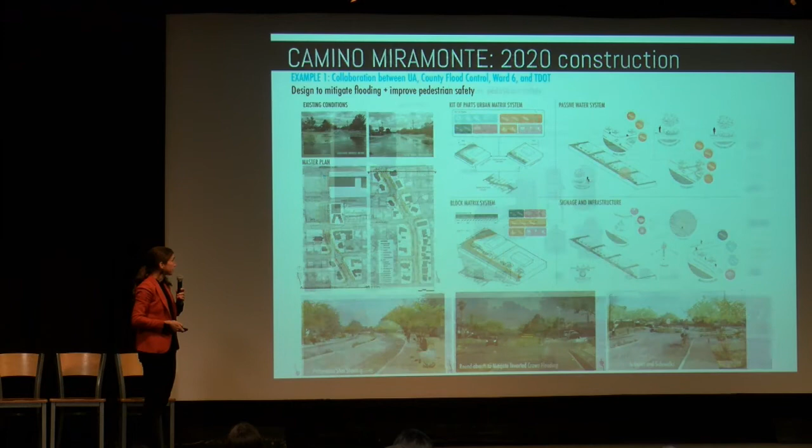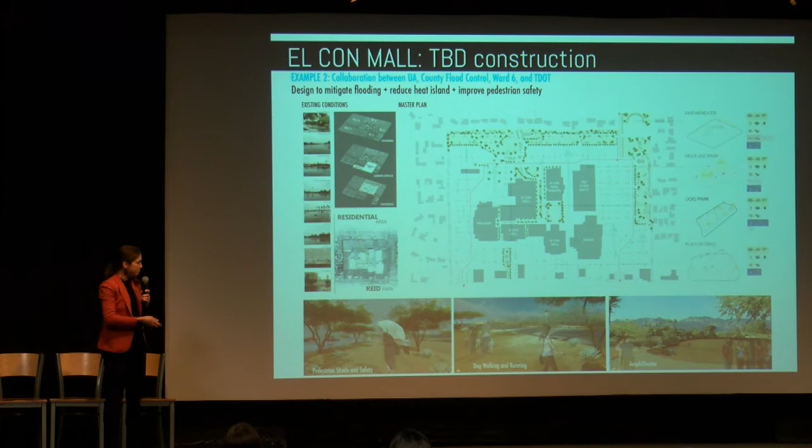And then this is another example you may all be familiar with, El Con Mall, which has a lot of parking and is also termed the headwaters to a lot of downstream flooding, particularly in the Palo Verde neighborhood. The city of Tucson has been successful in an ongoing negotiation that looks like it's going to be finalized to purchase some of the back parking lot areas to put in a park and execute a green belt around El Con Mall. So those are 2 solutions there.

So the second part is looking at regulatory innovation. This project came from more my experience in practice, and knowing that the technological innovation really does exist to realize at least net zero urban water or net zero buildings. The frustrating part has really been this regulatory innovation side.

This project looked at basically starting with taking 10 commercial net zero water case studies, locating similar systems, doing an Arizona code analysis, looking at municipal, state, and federal code, across both the building code, but also public health and environmental code, and then reflecting that back into an actual net zero water building design.

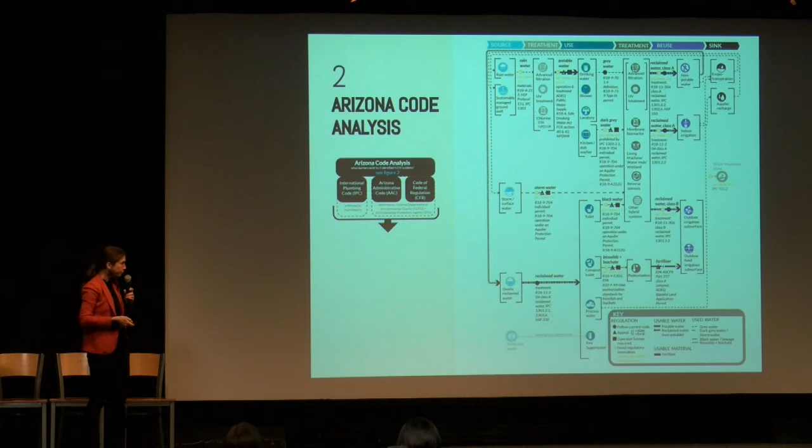This was the outcomes from the Arizona code analysis, and basically all the yellow that you see on the screen are places that are barriers that need to change in order for us to have operational commercial scale net zero water buildings within Arizona. And then this is the third part I was talking about, looking at a specific building design case.

Really looking at 3 different systems: decentralized potable, then gray water reuse, and then third, on-site wastewater treatment, and the different code issues that exist across all those different regulatory environments that I mentioned.

So what you see is water touches all across the code. It's really complicated because it's definitely a main concern for public health, as well as environmental health, and plumbing. The vocabulary changes from one code set to another, and a lot of these places of innovation are currently not even integrated in the code, where you wouldn't know where to begin as an architect or engineer trying to put in some of these more innovative systems.

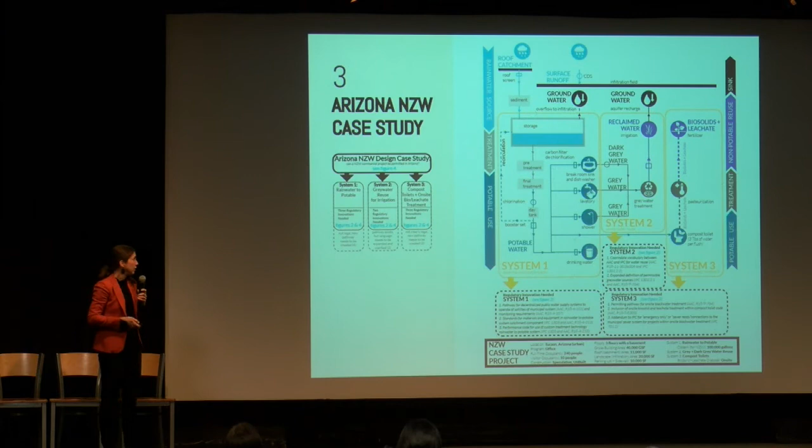Let's see. Well, I don't know what happened, but there's a couple more slides. So I'll tell you what they said, and then I'll finish up.

So basically, I looked at these two different areas that I talked to you about: infrastructural innovation that needs to happen, and regulatory innovation with that. In the architecture studio, how we've been looking at some of that regulatory innovation has been by partnering.

Last semester we looked at converting downtown Tucson into a net zero urban water area by 2050. We partnered with Tucson Water, Pima County Wastewater, and Pima County Flood Control, with leaders in those agencies, paired with students to design new prototypes where we could incrementally adapt and convert our urban environment over time.

We looked at that across five different water types: groundwater, rainwater, stormwater, gray water, and reclaimed wastewater. So really figuring out, you might have heard this term, one water system. Dominic was talking about integrated water management, but really, how do we take all these different systems together and optimize for achieving something like net zero water? And with that, I will conclude. So are there any questions?

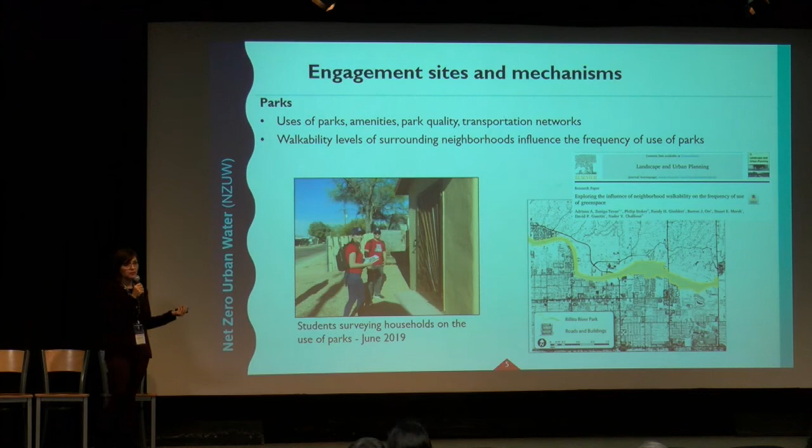We also look at community values around green infrastructure, green space, and parks. I'm working with a colleague, Phil Stoker from CAPLA, to look at how neighborhood design affects the use of green space and the frequency in which people visit it. Here you see a photo of students surveying residents door to door, asking whether they go to green space, how many times, and so on, around the Rillito River Park.

This is work from my colleague Stephanie Buechler, who works on projects related to community gardens and an urban farm in Tucson. She looks at sites for urban agriculture and is very interested in getting access to healthy food for low-income people. As you know, there are food deserts mostly in low-income areas that don't have access to healthy food, so community gardens bring the opportunity of providing healthy food to low-income people.

She also looks at the gender perspective, women organizing themselves, refugee women in particular. She also studies water use and the sustainability of gardens, looking at all the policies and programs, and discovered there is a lack of water conservation training for gardeners—they don't even talk about that, which we should. She also looks at new policy instruments put in place by the utility company to reduce the water bill for nonprofits running the gardens. That's great, but still there is no attention to saving water, so she's identifying some policy gaps through her research that we can use to improve those programs.

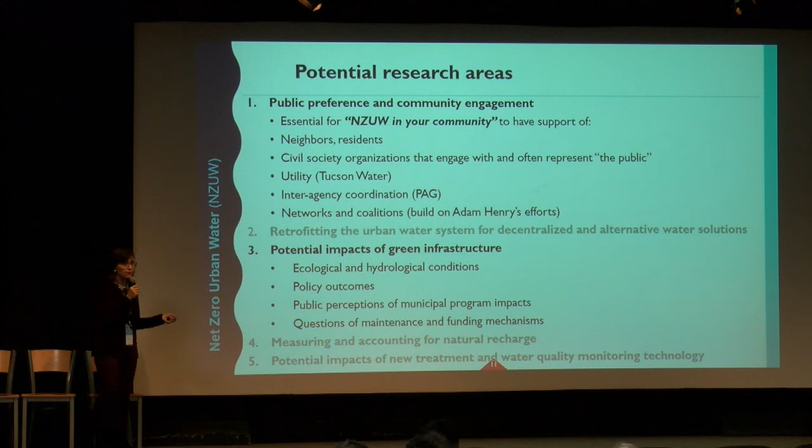So as you see, the public policy component plays a big role in this idea of net zero urban water. I like to end my talk with a quote that I think summarizes the main point: systems make it possible, but people make it happen or not. I think at the University of Arizona, we are well equipped to address both the systems—the infrastructure, the engineering—and also the people aspect, making it a reality. That's it. Thank you.

I don't know if I can take questions. Maybe not.

The biggest policy challenge that comes to mind is that there are efforts to address green space and environmental justice issues around it. The city recognizes that and created rebate programs to help people adopt these systems. But rebate programs require money upfront—you pay upfront and the city reimburses. And who has money upfront? Wealthy people. So there's an environmental justice component in that program.

Now they are adapting that program, and some nonprofits are lending money to low-income families to apply for those rebates. But that program also had the flaw that it only looked at active systems—cisterns and tanks—not rain gardens and trees. So we're still seeing less greening in low-income neighborhoods. It's a really iterative process where we have to consult the community about their conditions to create programs adequate to address these bigger questions. So that's the one that comes to mind.